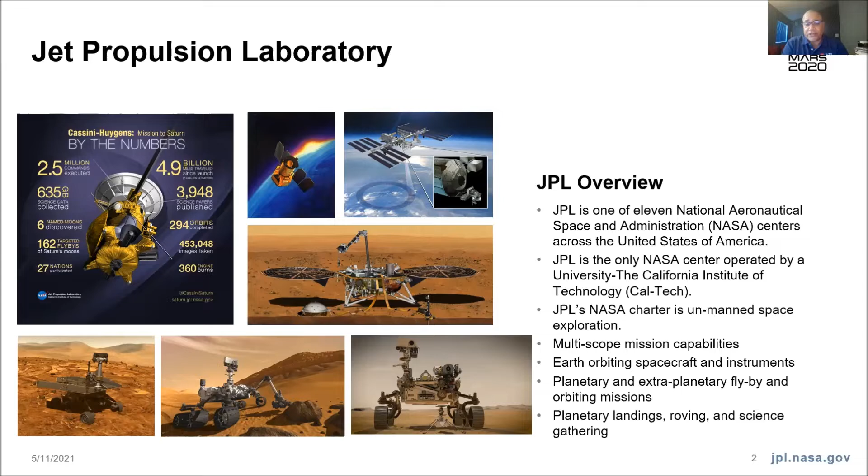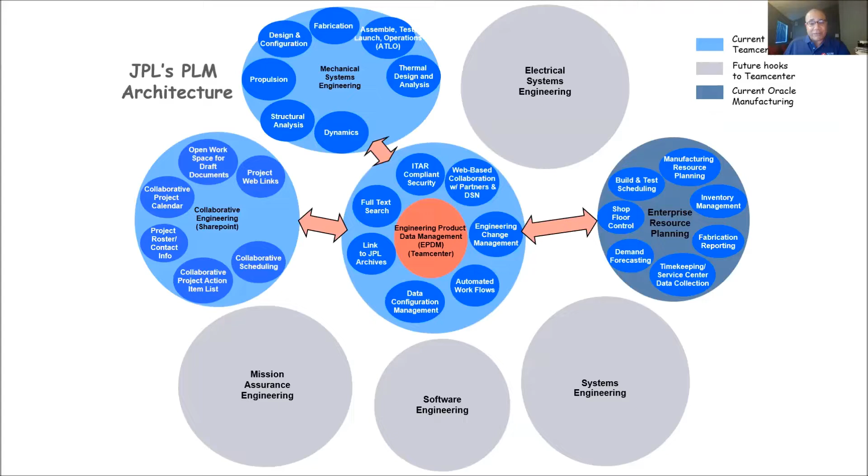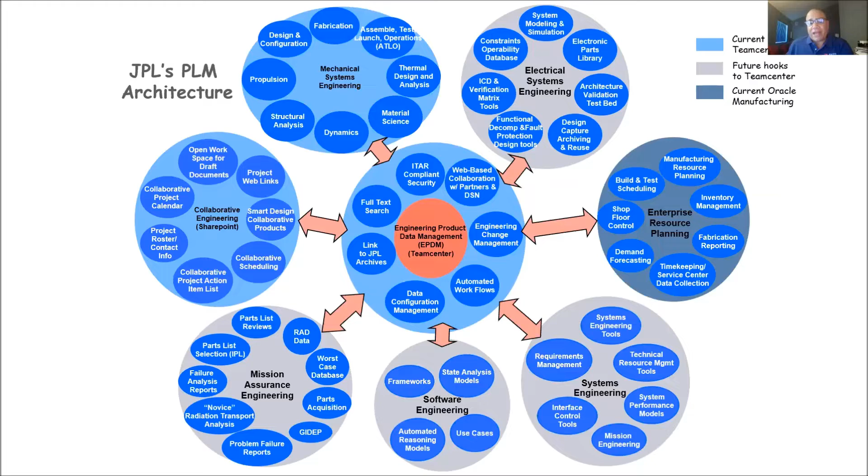This is, again, just a look of what it looks like in that PLM architecture at JPL. In the center, we have a central data management system. We're currently using Teamcenter. We built a framework on it called EPDM, or Engineering Product Data Management.

And we capture all kinds of data in the work that we do. That work is collaborated between many systems. I work in this bubble over here, mechanical systems engineering. But there's mission assurance over here, software engineering, systems engineering, enterprise resource planning, electrical systems engineering.

We cover the gamut. Pretty much can do everything in-house, but we always partner with outside agencies, whether it be other NASA centers, other space agencies like European space agencies, universities, scientists at other universities. So our work is always collaborative and through partnership to some degree.

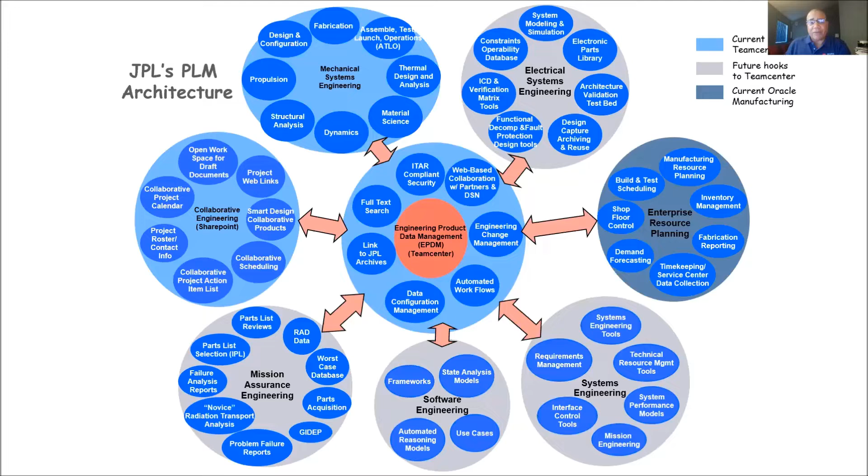So in this bubble is where we're going to spend the rest of our time tonight, in the mechanical systems engineering realm. And I particularly work in the mechanical design environment in this mechanical systems engineering. So we'll move on to that and see what that looks like. This is the center of my world.

We create a master model design throughout the design lifecycle of a project like the mission for Perseverance. And as we create that data and mature it, we collaborate with these sorts of organizations that are part of mechanical systems. We have to work with analysis folks. That could be thermal analysis, dynamics, structural analysis, several organizations within that.

We produce content from this mechanical design environment. And by mechanical design environment, you guys are probably familiar with the term CAD, or computer aided design. That's what's at the core of this system. We use that environment to do trade studies. We have to create support equipment. We do all sorts of simulations and inspection data after we've manufactured it.

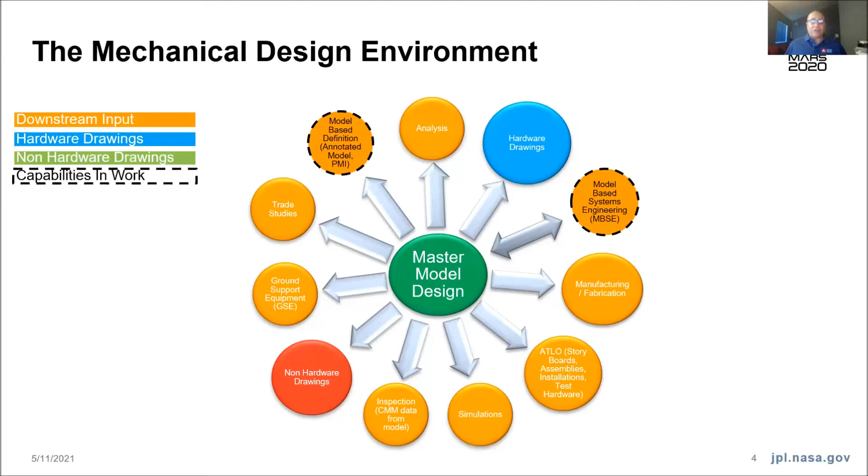We provide directly from this environment manufacturing data so that parts can be built. And so manufacturing and inspection kind of work together. And then finally, in the ATLO environment is where we build and test our spacecraft. We test subassemblies and put them together with a larger system. And we have to test and verify and validate requirements at those high levels. So it's push and pull throughout in this environment.

And so on to the mission, the Mars 2020 mission. And I just want to clarify here, I'm calling it the Mars 2020 mission. That's the name of the whole project and the spacecraft. Perseverance is just the name of the rover, but it takes a whole village of people and hardware to get that rover to the surface of the planet. So you'll see all of that here.

So Mars 2020 came about after we landed the previous rover, Curiosity, or the Mars Science Laboratory spacecraft and mission. Once we landed that and had some success, NASA wanted us to take that same architecture, remove the 10 science instruments that were on board, put 10 new science instruments on board, reusing that architecture, and we should be able to do all of that at a significantly reduced cost and schedule.

And so they thought that would be an efficient way to get the next level of rover on there to produce what we needed. So we call that a reuse mission or re-architecture. The idea was to reuse as much of that previous mission as possible, redesign some things when needed and approved.

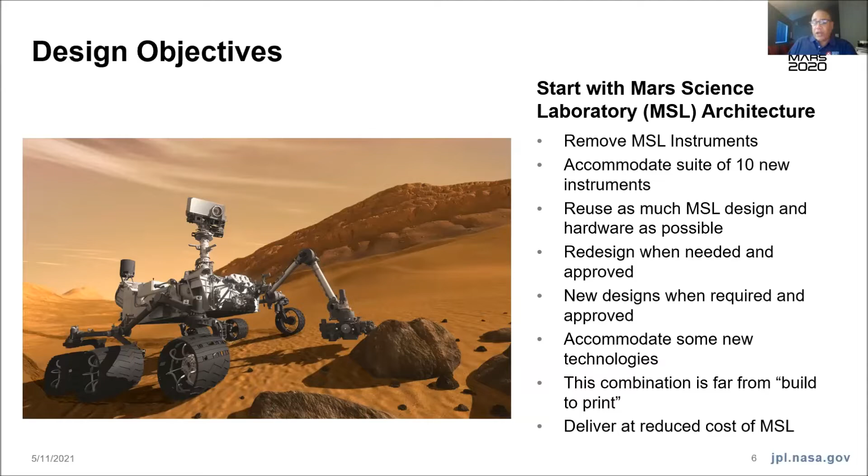It was far from that. In fact, it was actually harder than building it originally the first time. And you'll see some of those reasons why as we go on. But we were able to deliver it at a reduced cost and schedule.

So here's what the previous mission looked like, MSL, again, Mars Science Laboratory, and our approach, at least for starting out, how we were going to approach this reuse. So we were going to reuse the cruise stage. That was pretty much as is. That was the intent. We knew we needed a bigger parachute because we knew there was going to be more mass on the rover. So we knew that from the beginning. We intended on reusing the back shell as is, minus some minor updates.

We actually had a spare descent stage. And by spare, in order to meet the testing schedule on the previous mission, we built 2 of them and were able to do the testing in parallel. So we had this one left over, and we were able to use most of that as a starting point here. That was a significant reduction in resources.

The rover was the wild child of the bunch. We knew that was going to have the most change. We were able to maintain the same logic and architecture, but there were a lot of updates we had to do. And we actually had a spare heat shield. Again, same type of thing. In order to accommodate the testing schedule of the previous program, we built 2 of them, and were able to do different tests at the same time.

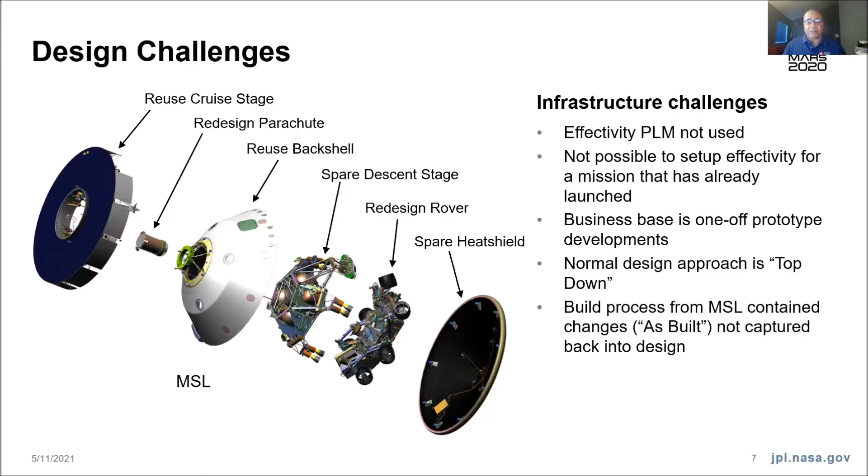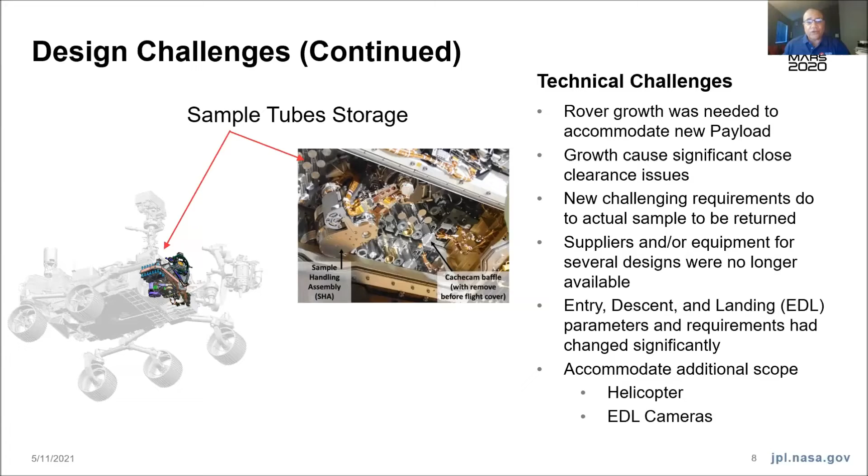Keep in mind, we had never physically seen EDL with our eyes. It's always been in simulations only. And so this was going to be a first. So you mix all that up, and that was our going in posture for the new Mars 2020.

Some of the challenges that came just from the reuse process. First of all, JPL, our business base was not built for reuse or re-architecture.

We were in the one-off prototype business, meaning we built something that was unique. Our charter with NASA was to do R&D, lead that front edge. There's no return on investment with what we do, so the aerospace industry is not going to do this. And so we do one-off, launch it, never get it back. So there was no need to really take care of reusing it again, because that's never coming back. We're not going to fix it, redo it, we're on to something new. So this was new for us, for our business base.

Reuse needs effectivity to work properly. Effectivity being, okay, maybe opposite to our prototype business model is maybe a car manufacturer like GM. They're going to build 50,000 of those cars. So they're going to build 50,000 of all these things we're showing. They better keep track of it. They're going to serialize it. They're going to keep track of, well, serial 1 went into this version, and so forth. Well, we don't do that. We build one. So we didn't have that sort.

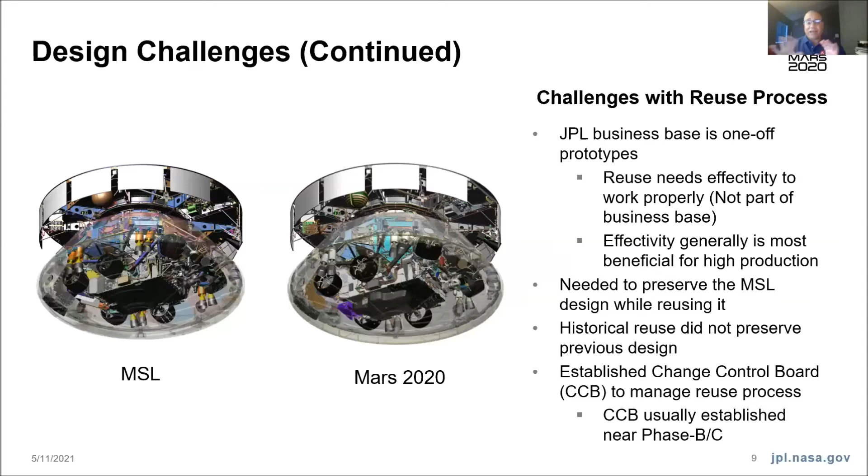So you'd have a change control board doing that late in the game like that. Now we have a CCB monitoring things from day one throughout the whole process. And I happen to be on that board as well. So we were busy around the clock managing this new chaos for us.

Now I mentioned that the parachute was intended for redesign from the beginning. So we had a whole new test program to validate what we redesigned. So that was a big program. The back shell was, again, high heritage. We actually did not have to modify that a lot.

The descent stage, even though we had a spare and were reusing that actual physical hardware, we had to make some changes because of some of the change. That descent stage actually mounts to the rover. So because the rover was so different, we did have to make some updates to that descent stage. And as expected, we knew the rover was going to be a significant amount of redesign.

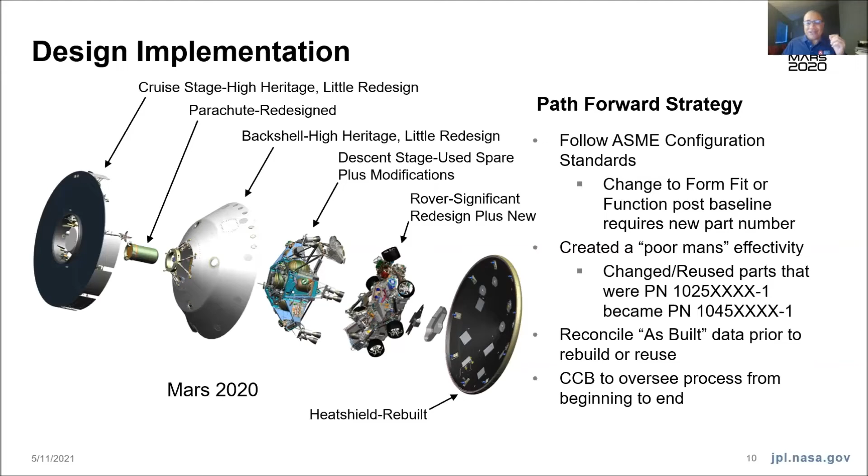And you stir all that together, and that was our life on the edge from concept to launch. And we made it through that. We had some therapy going on. We had some comforting each other. We had some trials and tribulations. We had things that worked beautifully. And it turns out that brings a tear to your eye, just like when things break. You can't tell the difference sometimes.

So all that being said, I wanted to just kind of share with you a case study of the type of challenges we ran into throughout, and they're typical, not just on this mission, but most of the missions we do, especially landing something on another planet, that's very difficult. So here was a case study for a particular challenge.

I showed you that we talked about that descent stage and that rover. They're bolted together until they get to near the surface of the planet. Then they separate and go into what we call a sky crane configuration. Well, most of our separations are controlled by guide rails. And so those guide rails keep things from flopping around as they separate.

Well, this particular separation, we couldn't use guide rails. It was an unguided separation. So literally just gravity and the thrust from these engines are going to cause that separation. So you actually have wind and turbulence and all those things going on and motion here.

So clearance, we absolutely could not tolerate recontact of these two elements as they separated. That took a significant amount of our resources managing from beginning to end. And by end, I mean launch. So this was one of the biggest challenges. And we're going to walk through this use case and kind of show you what we've done before and the new techniques we use here.

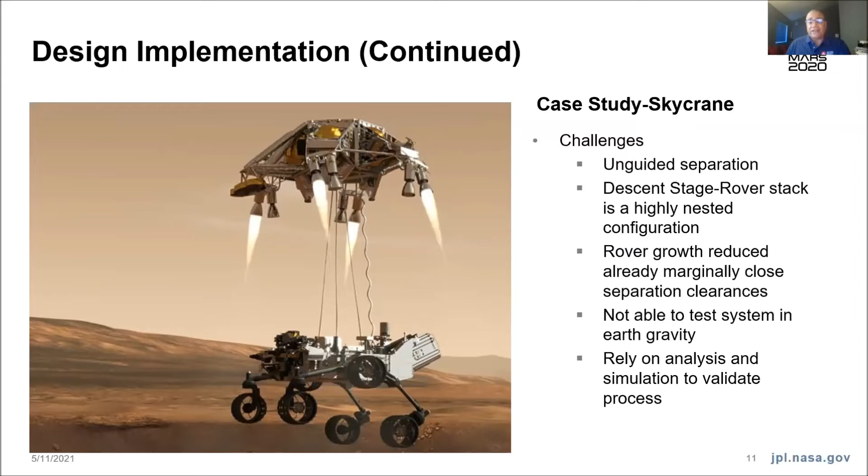We don't possess or can't recreate the Mars atmosphere and create a full test of this sky crane. So we could test different pieces of this process, for some loads here and there, things like that, but we could not test this whole process. So we relied heavily on analysis and simulation to validate this process. So that's what we're going to talk about.

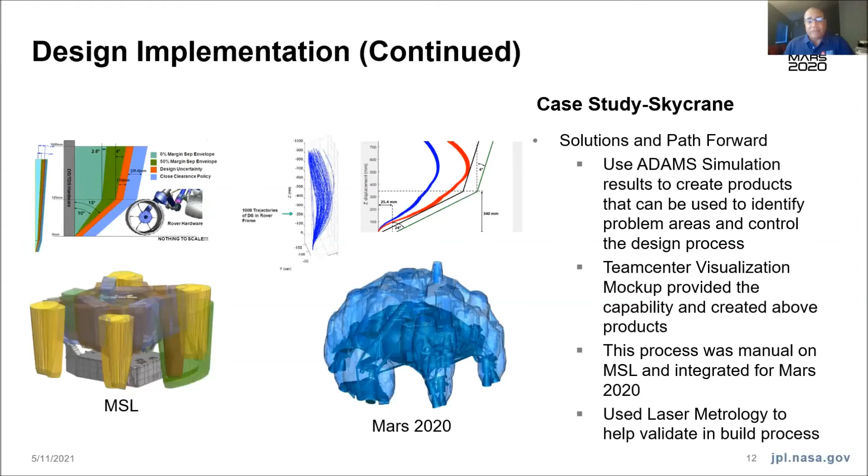We took this set of curves, the red and the blue where the simulation runs. We built a set of curves that bounded that, but with some margin built in. And we reran it with those marginal curves and got a much more robust design environment envelope of the same thing. So that saved the day. We were able to put that back in the design process and use that to bind all of our hardware design elements.

Now, one of our mantras at JPL is not to polish the cannonball. And we try to live by that. I work with such a significant group of smart people, talented in all elements, disciplines, and so forth. So we really could make things better all the time. Give us more time, we'll make it better. That's the problem. We have a launch schedule to meet. So we tend to avoid things where we're just trying to make it better. But there was a case where it came up.

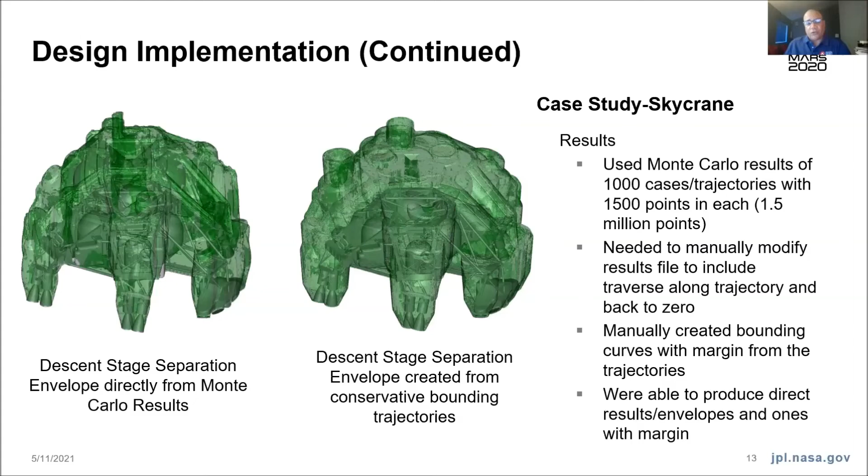So that wasn't polishing the cannonball. It actually was useful in a way those previous envelopes could not be. And now we had both for the full system. And that ended up being just a significant value for us, an improvement over what we had done before. It's not even fair to say improvement. We didn't have this before. And so it was done by hand.

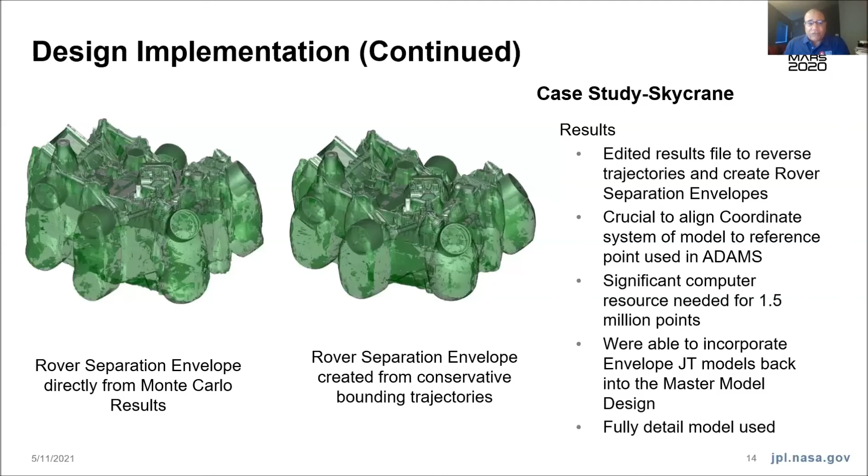Let's move forward. And so since it worked so well for those separation clearances, we had already divided the separation up into 3 categories. Separation clearances were for about the first half a meter in separation. And keep in mind, this sky crane configuration was a separation of about 7 meters long on those bridles. So 0.5 meter is not very much, but that was enough for the two vehicles to clear each other. So we called that our separation clearances.

Then there was a near field clearance after that. As it continues to grow in separation, it could also swing further, be impacted by the environment further. So we had a different set of requirements for those near field separations. And that brought into concern the radar on the descent stage. The radar is this element up here that looks for the ground and is mapping the ground with these antennas. Well, if the rover's in the field of view blocking that, we're not going to see the ground and be able to tell where we are.

That's bad. So we said, you know what, let's use the same process since we can create these envelopes with the entire vehicle systematically. Let's use that same process to verify the requirements for our near field separation and our far field separation. So that's what started this process. Early on, as the sky crane started, the mobility would cut loose and drop, and start hanging just by gravity. Well, that swept envelope affects the clearance again in that short-term area. And then there was a requirement that we had to be able to accommodate like 35 degree yaw of that whole rover.

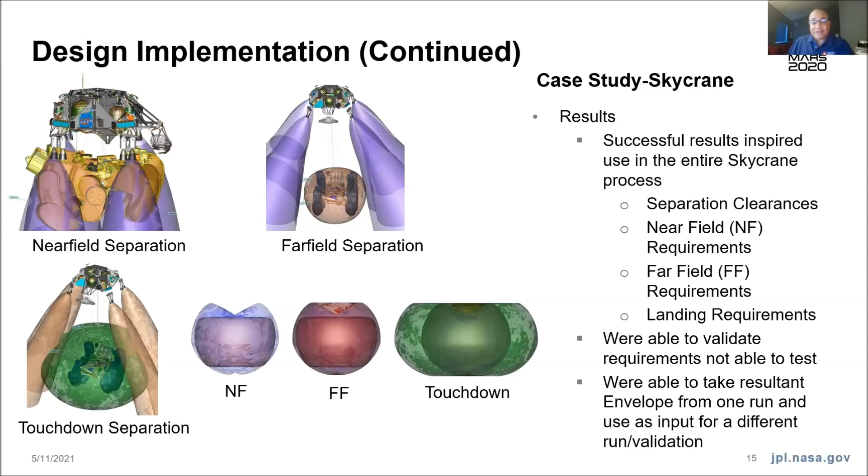And then when you're landing, we had requirements. You have to be able to land on a 30-degree slope, and that rover can swing plus or minus 1,300 millimeters. So you had a whole new volume. So the progression of it looked like this, from the near field to the far field to the touchdown. And we use those envelopes to validate our requirements. As you can see here, not all the requirements were met. So that was for the plumes, and here's what it looked like for the radar.

The areas where we determined it didn't meet the requirements here, we were able to disposition almost all of them and say, okay, this is in a low risk area. The odds of this actually occurring at this extreme were low. So they just had to move into a posture to accept the risk. We couldn't do any more to the design to fix that, but it became an acceptable risk. That is par for the course for a lot of what we do. When we get to an unacceptable risk, there's bigger, worse things that happen. So we were able to get through that whole process with acceptable risk.

So that's just a look at a case study of the typical types of problems. You can't plan for these. They creep up when you start putting things together at a system, subsystem level. And this is kind of the ingenuity and the creativity we use in actually how we go about solving these sorts of problems.

And the end result of that sky crane and separation and so forth was evident for the first time. Like I said, we carried those entry descent landing cameras to actually capture the footage of how this process worked. We couldn't test it on Earth, remember. We would have liked to, but we couldn't. And we hadn't had it on any previous mission, so we could see how things were.

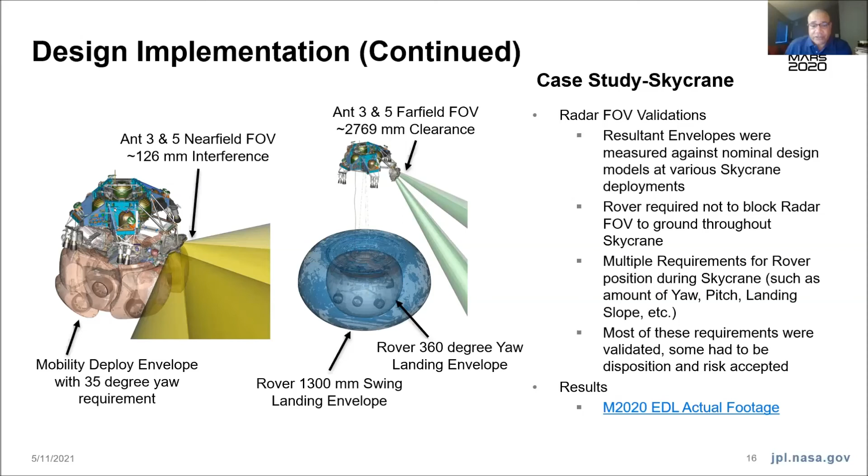People had to campaign to get these cameras on board. These cameras added no value to this mission. But for future missions, we can now validate. It was kind of like our test program for real during the flight. So what I'm attempting to play here is the video of this actual sky crane event.

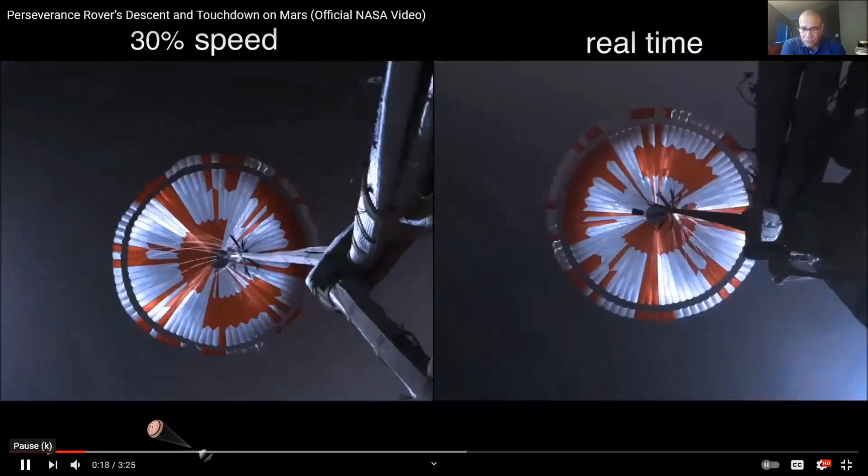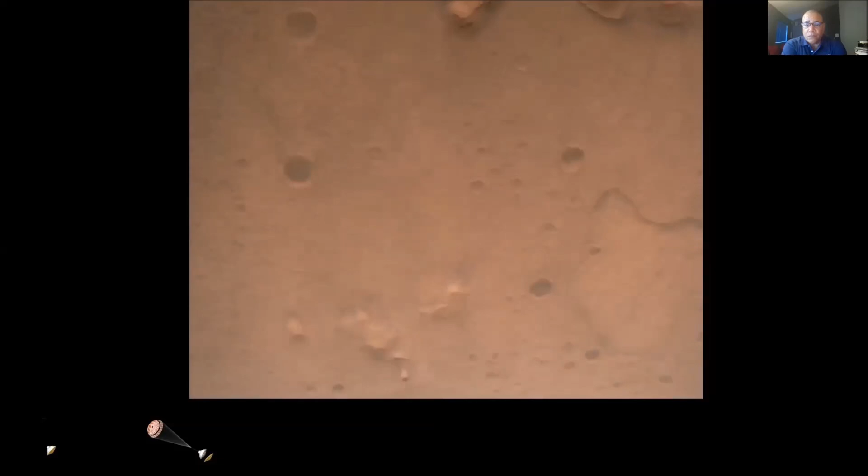So this is the actual camera video, Will.

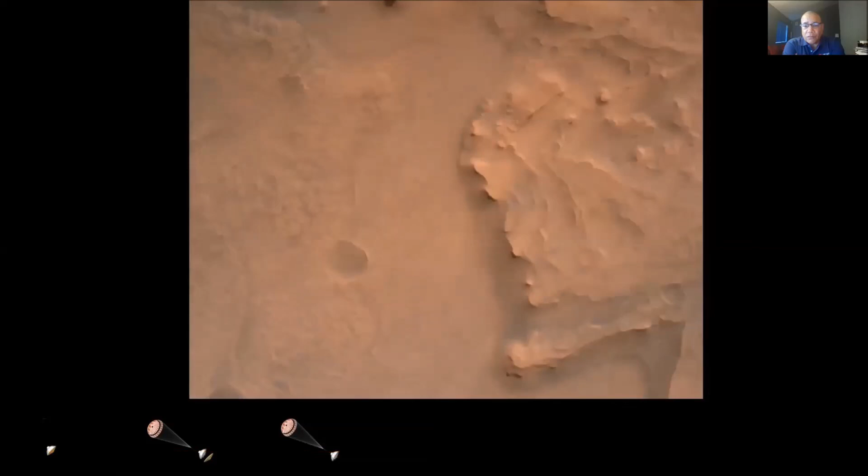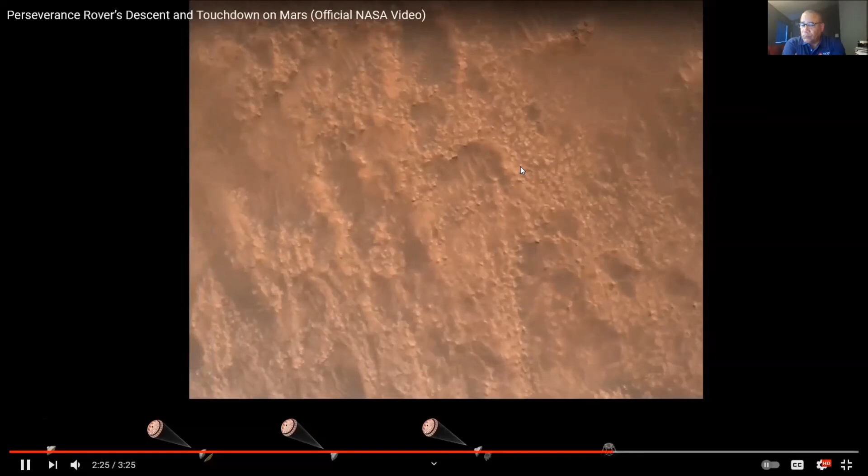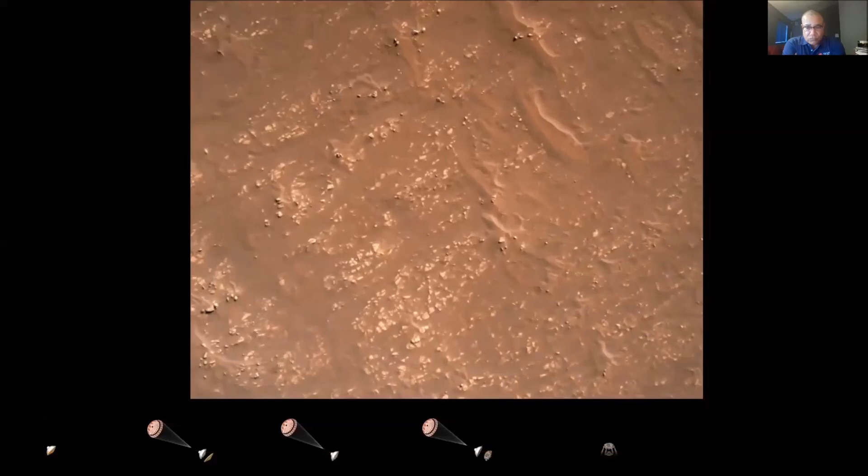Back shell sep. Current velocity is 83 meters per second at about 2.6 kilometers from the surface of Mars. We have confirmation that the back shell has separated. We are currently performing the divert maneuver. Current velocity is about 75 meters per second at an altitude of about a kilometer off the surface of Mars. TRN safety Bravo. We have completed our terrain relative navigation. Current speed is about 30 meters per second, altitude of about 300 meters off the surface of Mars. We have started our constant velocity accordion, which means we are about to conduct the sky crane maneuver.

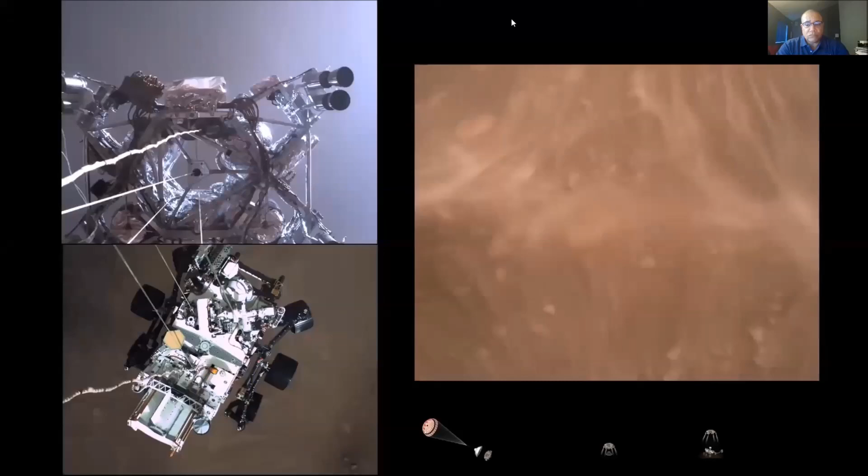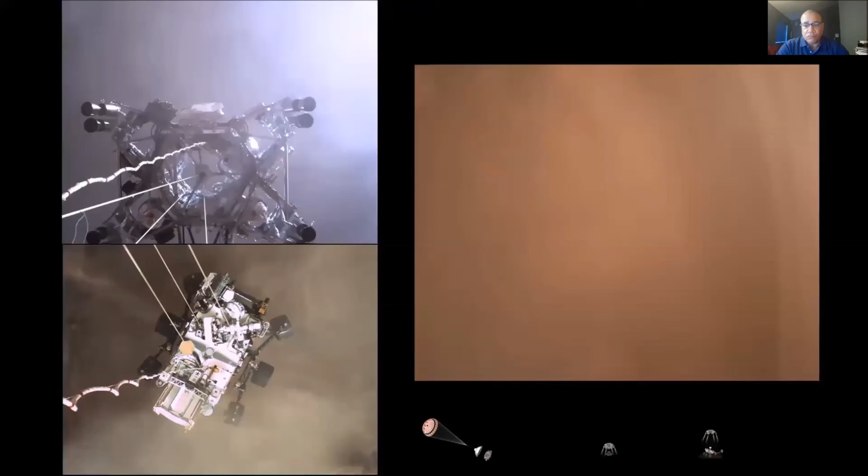Sky crane maneuver has started, about 20 meters off the surface. We're getting signals from... Confirmed. Perseverance safely on the surface of Mars, ready to begin seeking the signs of past life.

Well, we just finished watching the replay, Will, and I have to say it's pretty much as exciting as it was the first time. So yeah, what you saw was a result. People weren't clapping and cheering because they saw the video you just saw. Those videos didn't come until later when things could be transmitted. But we got the signals that things worked successfully, and that's typically what we were used to. This was the first time we were ever able to see what actually took place.

So I've been there 37 years, and by far that was the most exciting footage I've ever seen. And it doesn't get old. I can watch it over and over. And it points to a very successful effort of a large team of people, very talented people, innovative thinking, innovative problem solvers. We use innovative and robust tools to help us solve some of those complex problems. We have an infrastructure that enables efficient capture and reuse of the intellectual property. I say that now. We had to recognize when we started this that we didn't, and we had to develop it over time. But just another one of those problems that we had to solve.

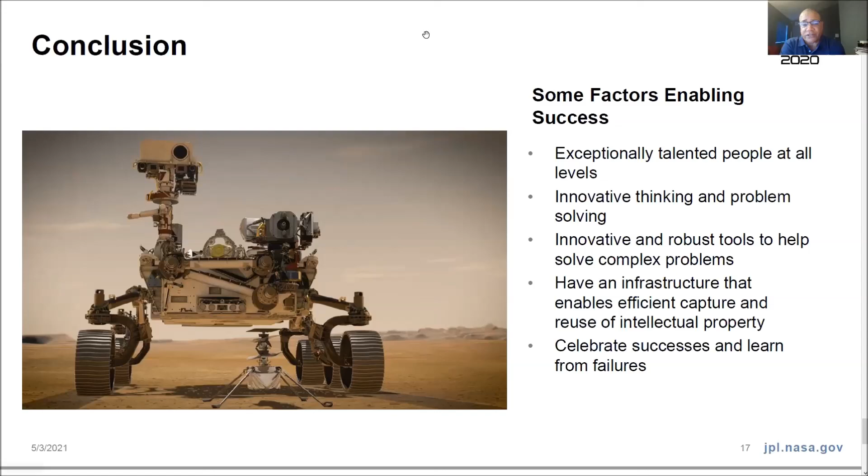That's just great. Some of the things that I learned from your presentation are about the different windows or envelopes you have to use in the design and how the simulation really changed.